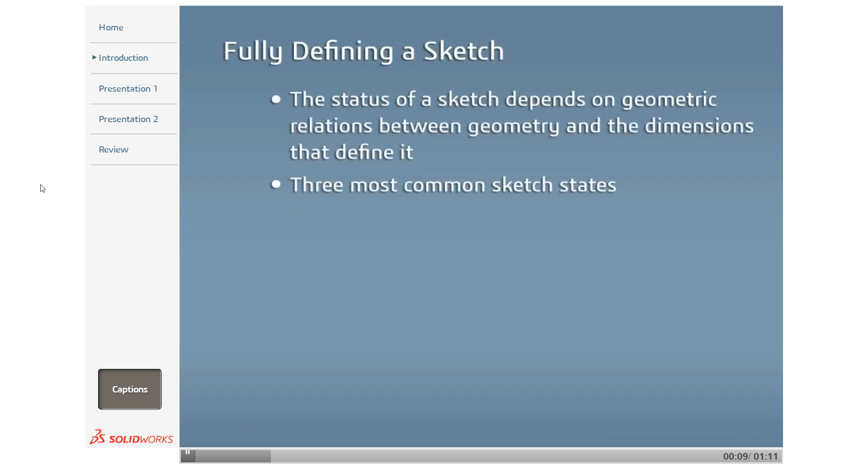In SOLIDWORKS, the status of a sketch depends on geometric relations between geometry and the dimensions that define it. The three most common sketch states are underdefined, fully defined, and overdefined, which are shown in the status bar at the bottom of the SOLIDWORKS interface.

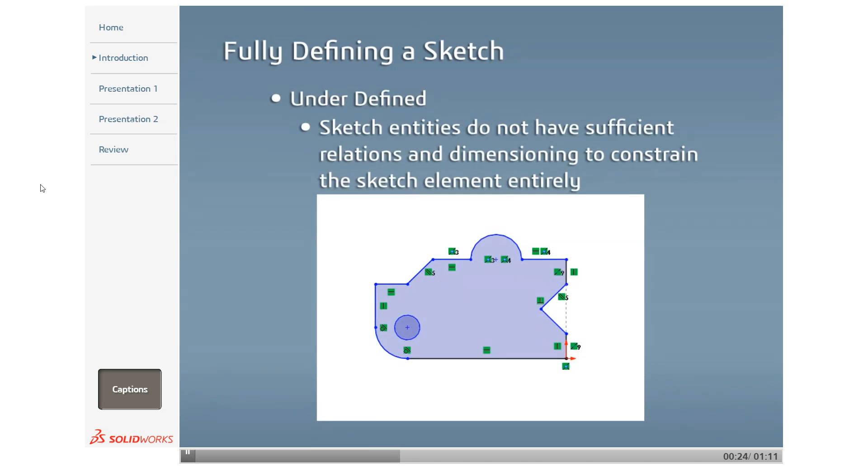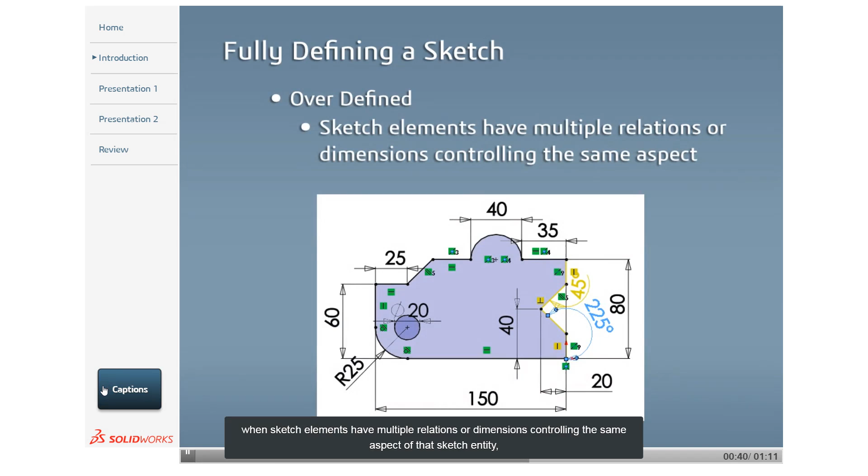A sketch has a status of underdefined when its sketch entities do not have sufficient relations and dimensioning to constrain that sketch element entirely. A sketch has a status of fully defined when all of the sketch entities are fully constrained. And a sketch is overdefined when sketch elements have multiple relations or dimensions controlling the same aspect of that sketch entity, which causes conflicts in the geometry.

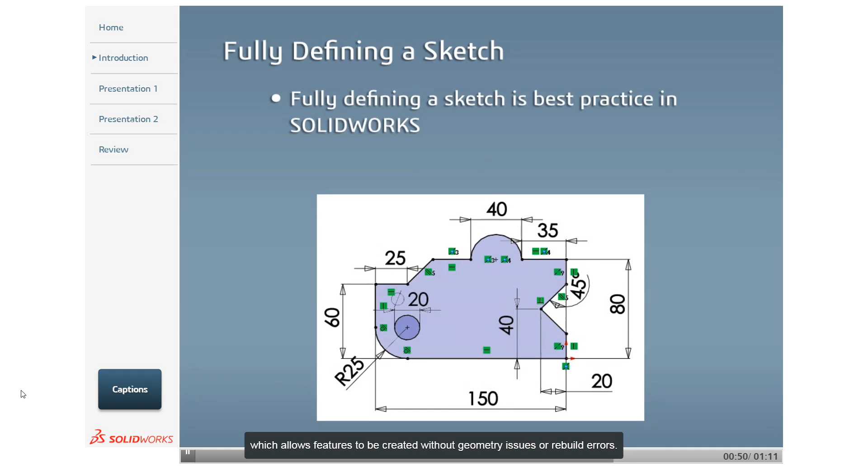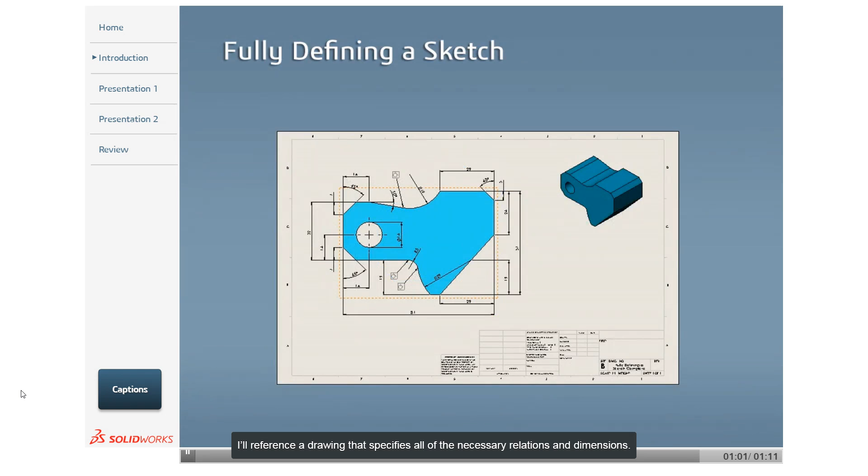Fully defining a sketch is best practice in SOLIDWORKS, which allows features to be created without geometry issues or rebuild errors. In this lesson, I will walk through how to fully define the sketch that already has a number of dimensions and relations added. I'll reference a drawing that specifies all of the necessary relations and dimensions. I'll also demonstrate how to fully define a sketch entity when it seems unclear why it's underdefined.

Here I have a portion of the sketch profile already drawn, and the part has an underdefined status shown in the status bar at the bottom of SOLIDWORKS. The dimensions already included are applied to simple sketch entities, such as dimensioning lengths, angles, and diameters. Creating these dimensions is covered in another lesson. So in this lesson, I will primarily focus on adding a few remaining dimensions and any relations needed to fully define the sketch. To do this, I must identify which dimensions and relations are missing to fully define the sketch.

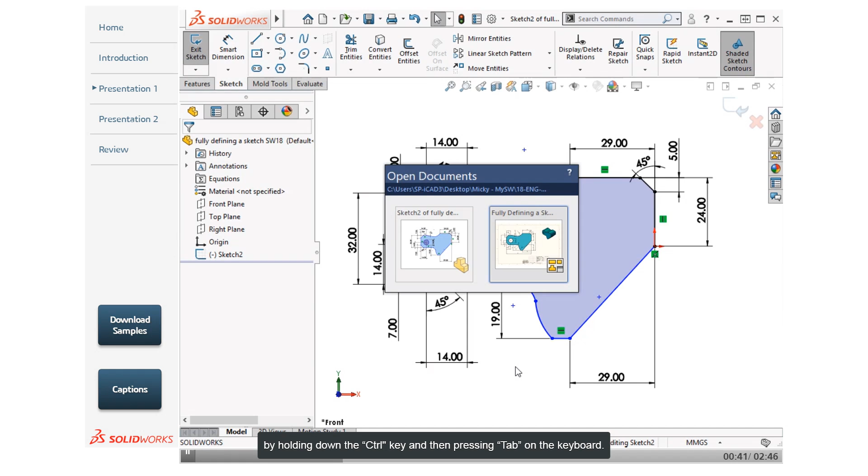I'll switch over to the drawing specifying this part's dimensions by holding down the Control key and then pressing Tab on the keyboard. Here I can see a number of additional dimensions are detailed in the drawing, as well as a few callouts for specific sketch relations. It is typically easier to fully define a sketch profile when the sketch relations are defined first, and then adding dimensions once all of the relations are in place. I will begin by adding the sketch relations I see in the drawing to the sketch I am fully defining.

There are three tangent relations shown here in the drawing, and there is also an implied relation that is not specifically called out. If I look at the arc that has a radius of 29 millimeters, I can see that the center point for the arc has been dimensioned with a height of 19 millimeters from the bottom edge of the part. However, there is no horizontal dimension, which means that this point must be coincident to the angled line. This means I will add 4 total relations to sketch entities in the drawing.

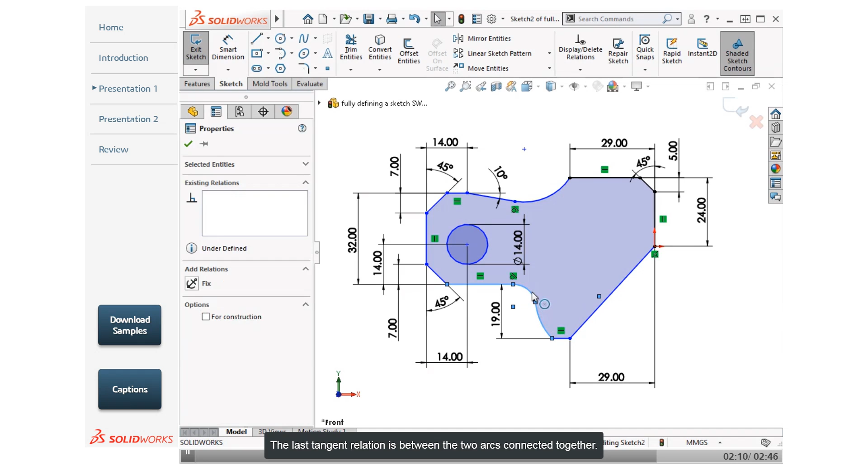I'll switch back to the sketch, and I'll begin adding the tangent relations. The first relation is between the angled line at the top and the arc it connects to. I'll select both of these sketch entities and click Tangent from the Context toolbar. The next tangent relation is between this horizontal line at the bottom of the profile and the arc connected to it. I'll select both of these sketch entities and select the tangent relation. The last tangent relation is between the two arcs connected together. I'll select both arcs and set the last tangent relation.

The only remaining sketch relation is between the center point of the lower arc and the angled line on the bottom right. I will want this center point to be coincident to the line, so I will select the center point and select the line, and choose a coincident relation. Now the center point will remain on the line. With these relations added, I will move on to adding the remaining dimensions to the sketch in the next video.

I want to identify which dimensions still need to be added to the sketch to make it fully defined, so I will switch back to the drawing. I'll start by identifying any length dimensions that are missing. The first dimensions that I notice are missing are the dimensions controlling the overall width and height of the part.

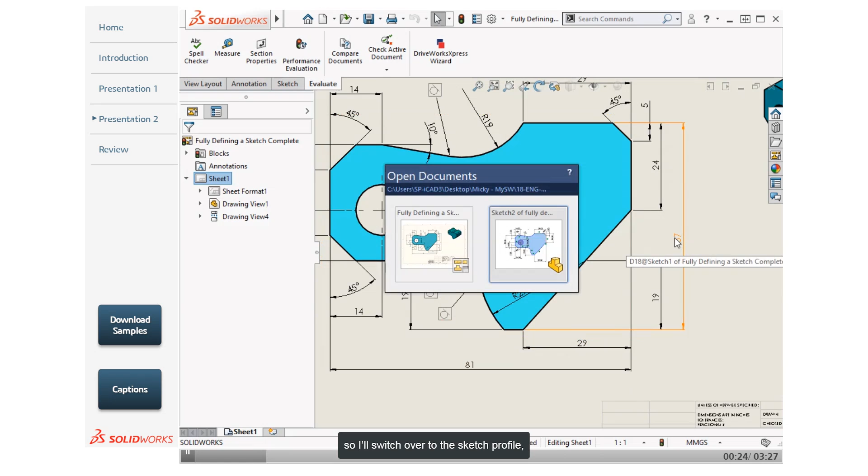I want to add a width of 81 millimeters and a height of 57 millimeters, so I'll switch over to the sketch profile. Activate the Smart Dimension tool. And to set the width of the part, I'll click on the vertical line on the left and the vertical line on the right, and type in a value of 81 millimeters.

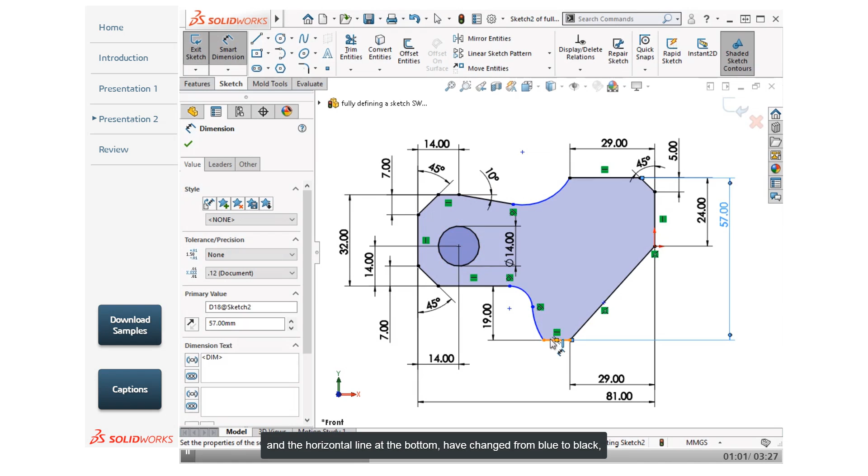I'll repeat this for the height of the part by selecting the horizontal line at the bottom and the horizontal line at the top, and type in a value of 57 millimeters. Notice that some of the sketch elements, such as the elements on the left and the horizontal line at the bottom have changed from blue to black, indicating that these sketch elements are now fully defined.

However, there are still a number of sketch elements still shown in blue. Most of these sketch elements are arcs, so defining the radius of the arcs is the next step toward fully defining the sketch. However, if there is any question regarding how a sketch element needs to be defined, clicking and dragging that element in the graphics area will illustrate how the sketch is constrained.

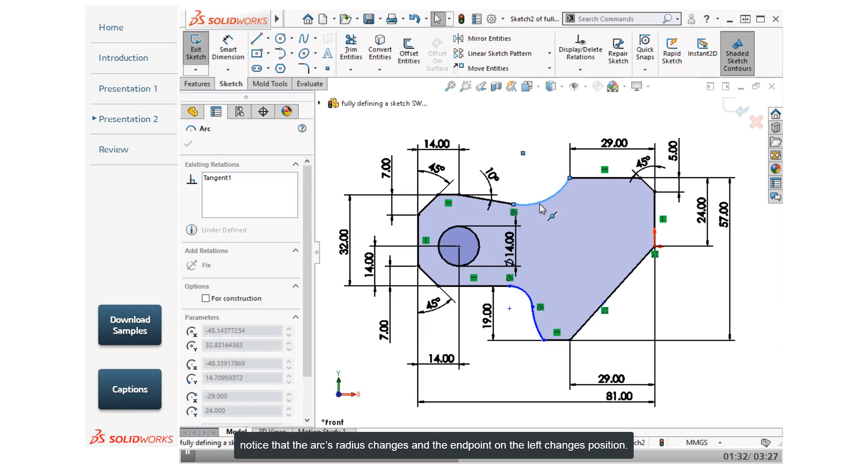For instance, if I click and drag the arc at the top of the sketch, notice that the arc's radius changes and the endpoint on the left changes position. In order for this arc to be fully defined, I'll need to make sure that the radius and the endpoint position don't change. I'll switch back to the drawing to view the remaining dimensions.

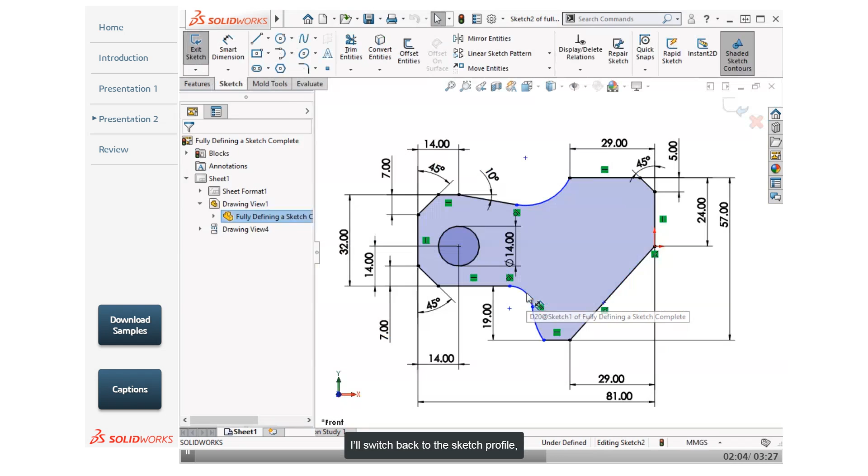I'll take note of the radius dimensions for the 3 arcs in the sketch profile. The top arc has a radius value of 19 millimeters. The small arc has a radius of 5 millimeters, and the bottom arc has a radius of 29 millimeters. I'll switch back to the sketch profile. Activate the Smart Dimension tool.

Select the arc at the top. Enter in a value of 19 millimeters, and the arc becomes fully defined. Then I'll select the small downward-facing arc. Enter in a value of 5 millimeters. And finally, click on the arc at the bottom and enter in a value of 29 millimeters.

It may seem a little strange that these 2 arcs are not yet fully defined, so I'll investigate how the larger arc performs when I click and drag its endpoint. As I move the endpoint back and forth, notice that the center point of the arc is moving along the angled line. This means that I haven't defined the height of that center point.

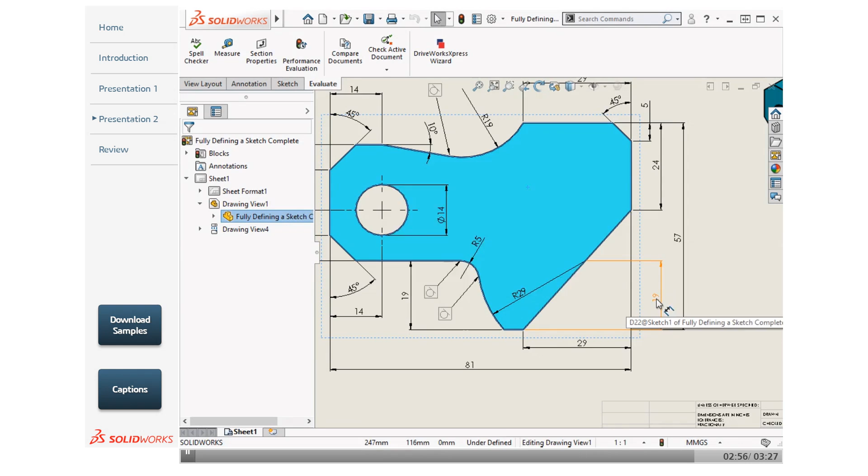I'll switch back to the drawing, and I can see that a dimension of 19 millimeters is used to set the height of the arc. I'll switch back to the sketch profile. Activate the Smart Dimension tool.

Select the bottom horizontal edge and the center point of the arc, and enter in 19 millimeters for the height. Now both arcs have changed from blue to black, and the entire sketch is fully defined, which is confirmed in the status bar at the bottom of the SOLIDWORKS interface.